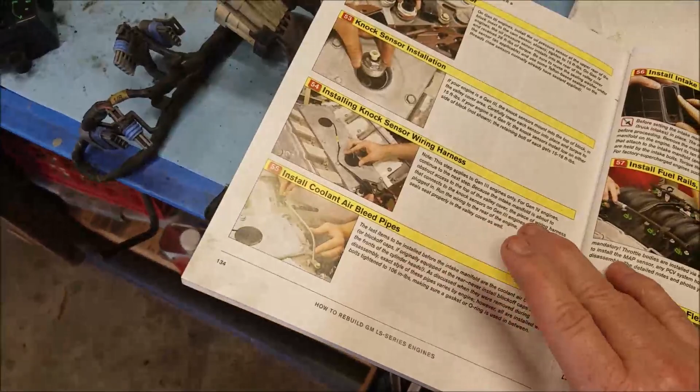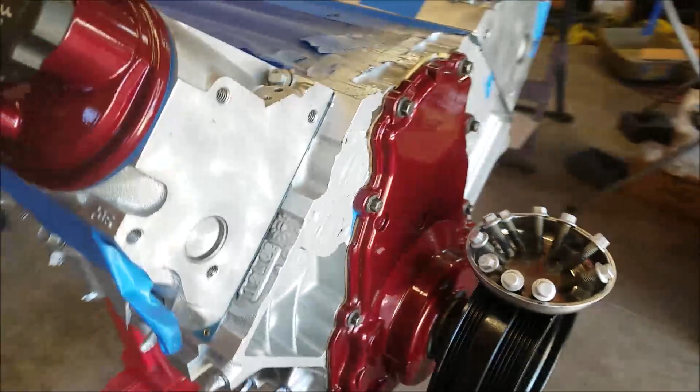All right, we're back at the block, and I did something while you guys weren't looking. If you haven't noticed, I painted the block. Yep, I sure did. I think it looks totally better than the dark color. I think it's just going to look great. Anyhow, it's like 3 coats of paint and a couple coats of clear, and it withstands heat up to 500 degrees. Duplicolor. Yep, that's a plug. Hopefully it stays on and I did it right.

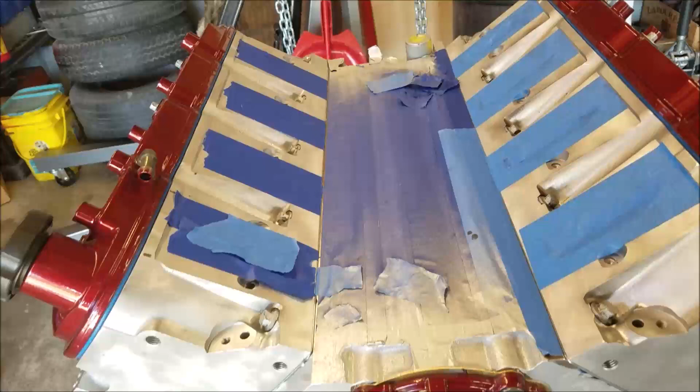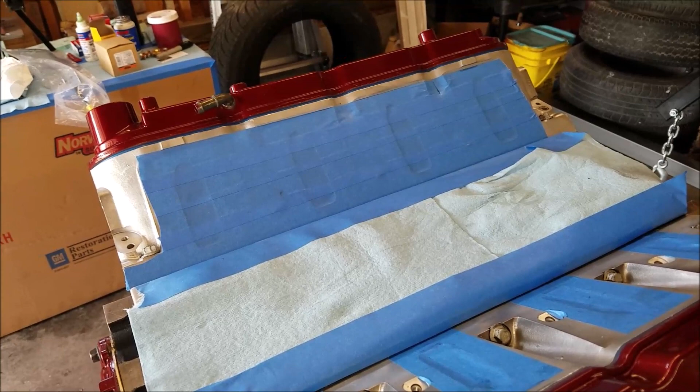But I still have to take the tape off, cathedral ports and everything. But before we do that, let's take a look at the air intake manifold. Before we test fit the LS6 to see where the distance is between the 2 holes, I'm going to draw a little black line around each cathedral port just on the passenger side. And then when we put it on there, the paint will indicate where the other cathedral ports line up, and then we can decide if that's actually the way to go.

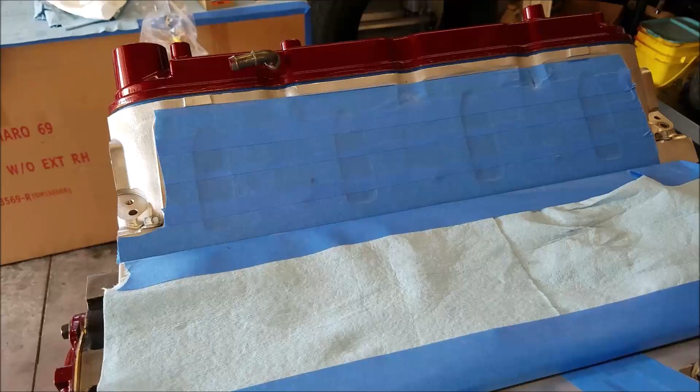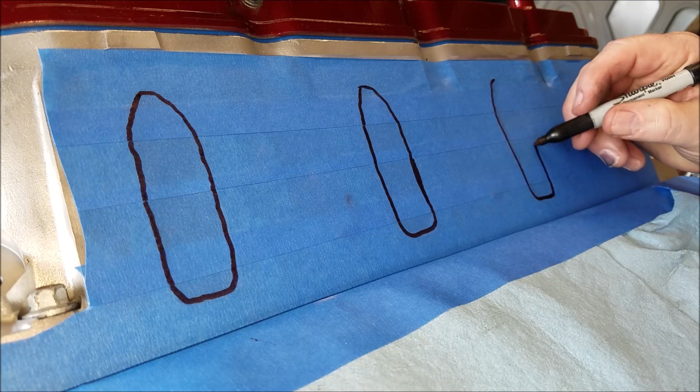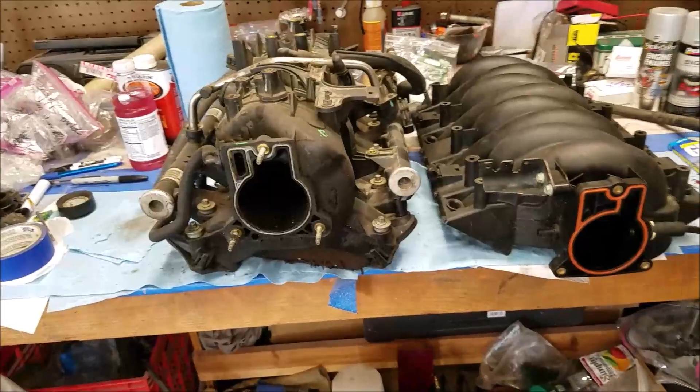All right, let's do a comparison of the 2 air intakes. On the left, you have the original from the 5.3, and on the right, you have the LS6. Starting off, you have an obvious 3.5-inch difference. So one of the reasons I picked what I thought was an LS1, which turns out to be an LS6, is that it's actually better. I'll tell you why. Because of the low profile, of course. When I shut the hood, I think there's going to be a clearance issue. So that's why we're going with the LS6.

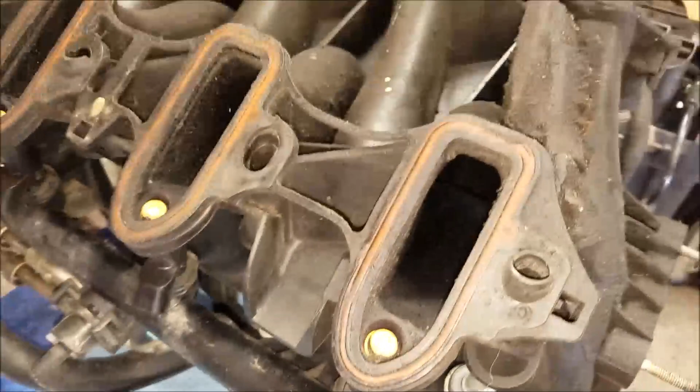Now, will it fit or not? I don't know. I haven't seen anybody do a video on how the ports line up. So we're going to do that. But let me flip it over and show you something. All right, they're upside down, so let's check it out. Let's go over here to the 5.3. You can look at the ports, they're upside down, but they're cathedral ports. So they just look like a bullet.

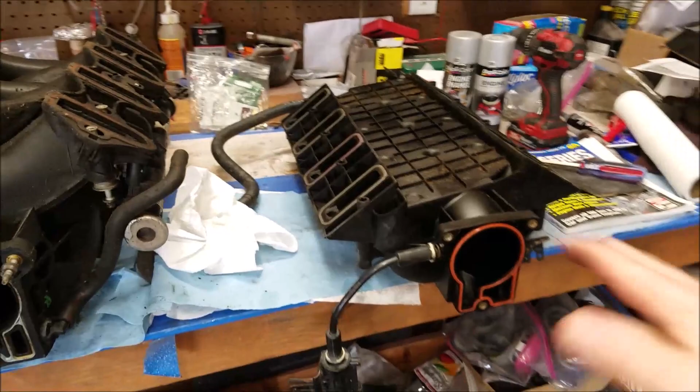And obviously the 5.3 takes in more volume of air. So the reason for using the LS6 is just for clearance, and it looks better. I don't want it to look like a truck engine, you know. I want it to look, I guess, like a 5.7. But it's just for aesthetics. You're losing air volume when you use one of these compared to this. I don't know what the difference is, but it's obvious. You're going to lose the air volume.

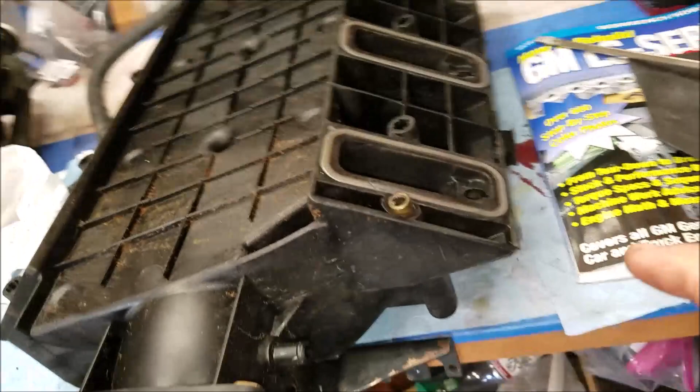So let's look at the ports over here. The ports are rectangular with rounded curves. Also, there's a pad right here, and back over here, it's like a foam pad. It's supposed to stop the water from coming in, but I took them off. On the LS1s, the center here has like a hump, a ridge line that goes down the center. And that's one of the big differences between the LS1 and LS6. I'm almost positive.

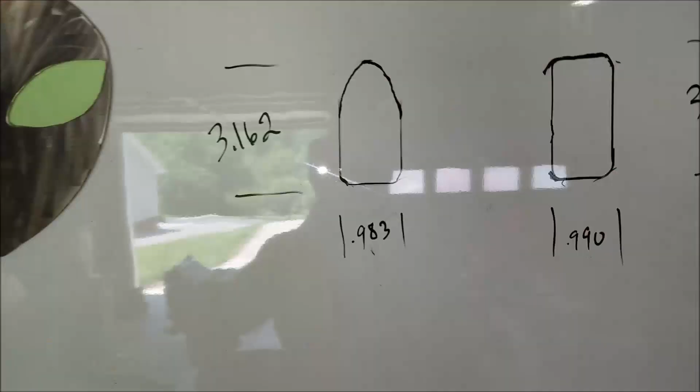So that's what threw me off. I was looking at the bottom, and I was like, wait a minute. This is not an LS1, because an LS1 has that and the LS6 does not. And also I looked at the part number and it came out LS6. Anyways, what we're going to do is compare the size of the intake ports on the LS6 and the 5.3. So I measured the 2, and these are the numbers, and they're not exact. I did use a caliper, but I could be off because I shake.

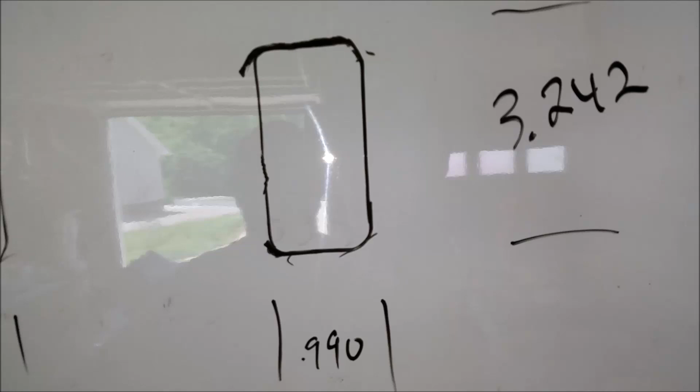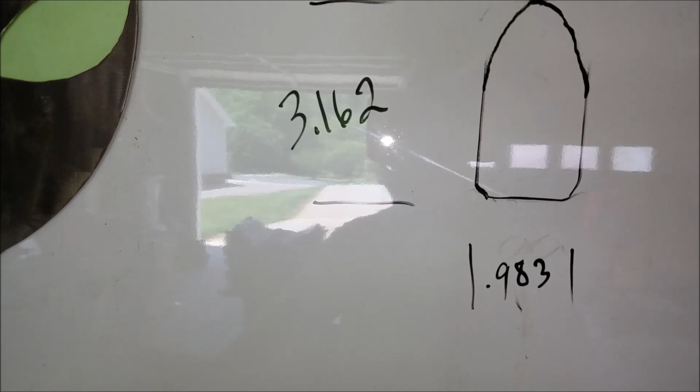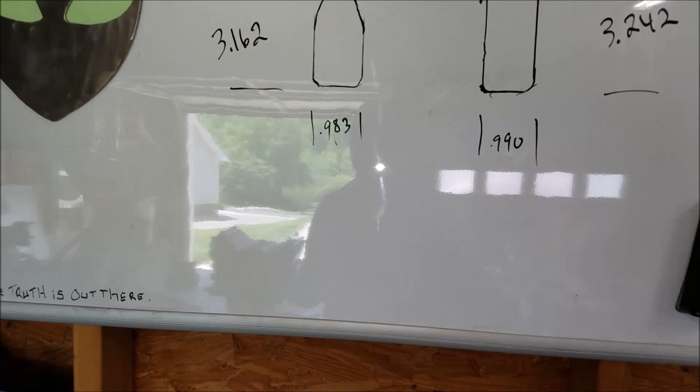Anyways, there's the LS6 on the right, and the overall height is 3.242, and the 5.3, the Vortec manifold, the cathedral, is 3.162. The width, though, is very close. The width on the cathedral is 0.983 and 0.990 on the LS6. As you can see, it's really close, so I don't know. I'm hoping this will totally cover up the cathedral ports when we match it up. So let's take a look at that.

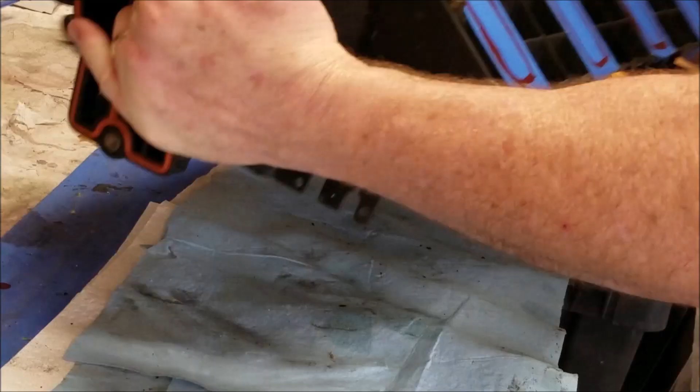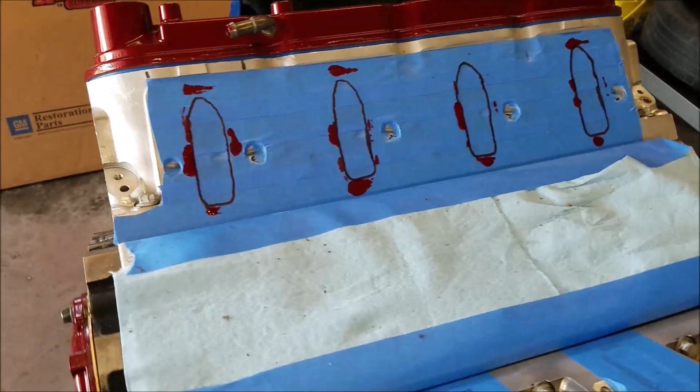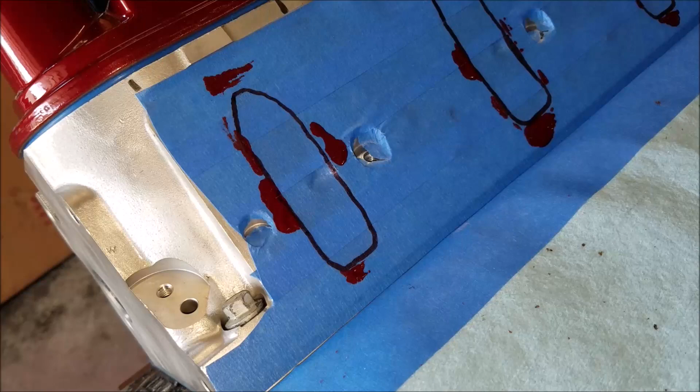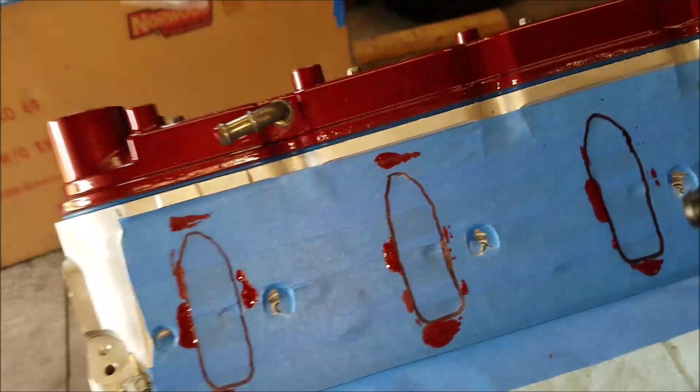All right, let's look at the results. Now, it's not going to be exact because those were the old gaskets, so they weren't sticking up as much. I got new gaskets and everything, so you can get the gist at the bottom of it. The bottom and the top and side to side, it's going to match up. Looks like it pretty much matched up everywhere, and it is covering the Cathedral ports on the heads, so good. I just wanted to check that out, and it does work.

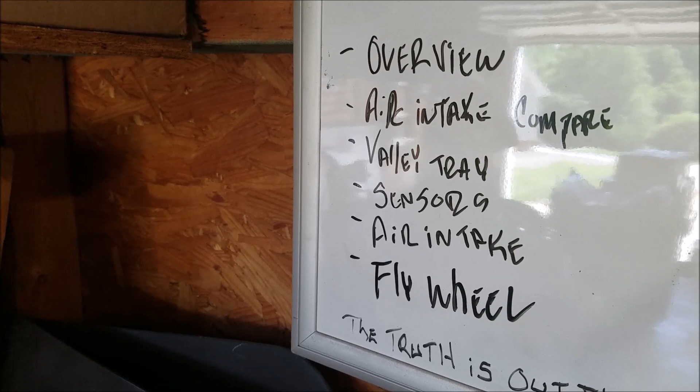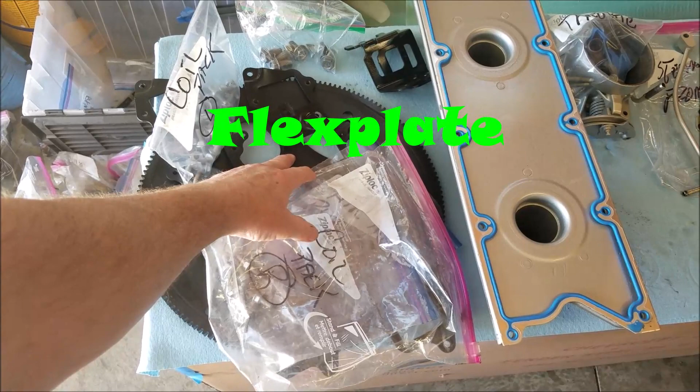All right, now that we've looked at the air intake comparison, we already did the overview of what we're doing. We're going to do the valley tray, the sensors, air intake, and the flywheel. That's all set up right here. We got the flexplate. It's already been painted. We actually had the valve cover brackets for the coils. We're going to actually install those today, hopefully.

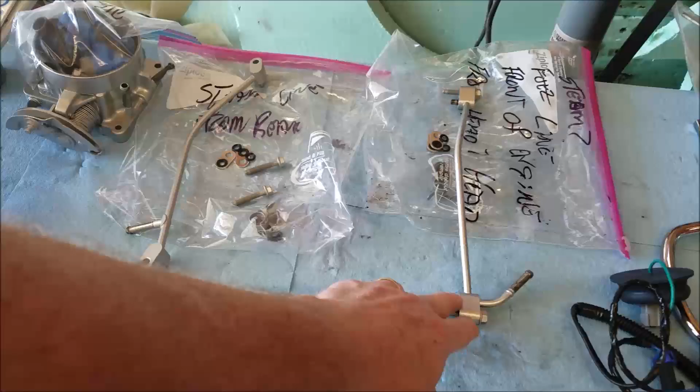And we got the valley tray, which I did paint already. Now the throttle, I went ahead and painted as well. The steam tubes painted, and we got some knock sensor harness and some sensors over here just waiting to be installed. But first thing we're going to do is the valley tray, so let's get started.

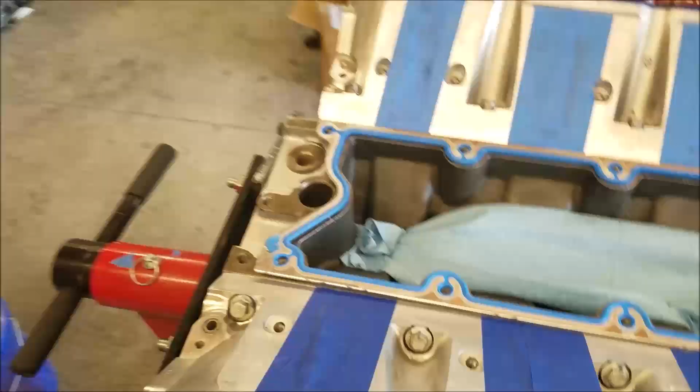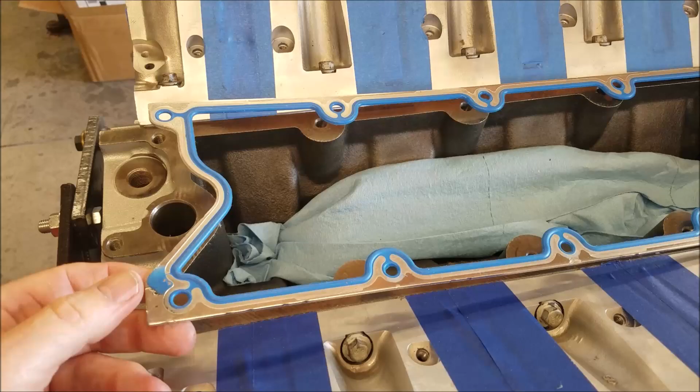All right, just wanted to point something out real quick. I bought the gasket kit for the block, and then I got one for the upper part of the engine. Now this gasket kit came with this type of gasket for the valley tray. Now it fits this way, but you can see this kind of hangs over on this area. It's not going to interfere with anything that I can think of, but

if you flip it over, it still lines up. The holes still line up, but this edge right here is going to interfere with the oil sensor, so you need to make sure that that tab is flipped over. I just realized that. But anyhow.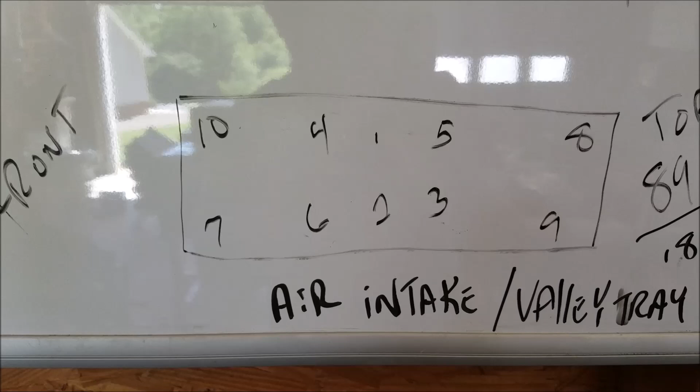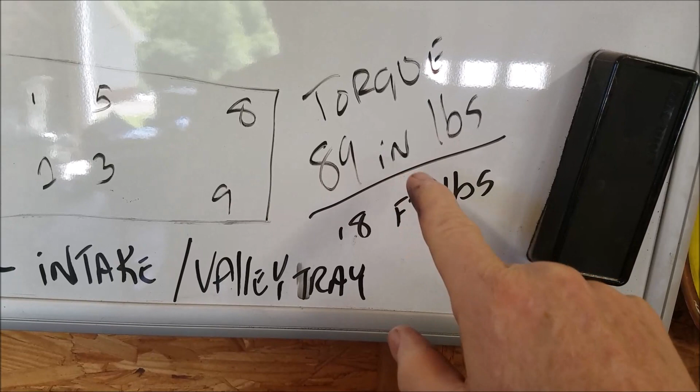All right, the torque sequence is the same for the air intake and the valley tray. It's 1, 2, 3, 4, 5, 6, 7, 8, 9, 10. And the air intake is 89 inch-pounds. The valley tray is 18 foot-pounds. That's the front. You just go back and forth, basically. They're both the same sequence, so easy.

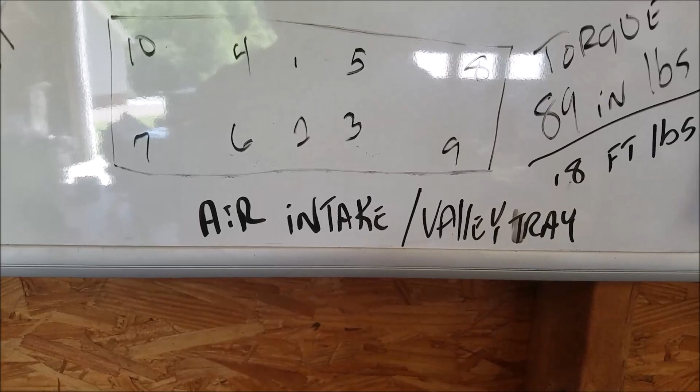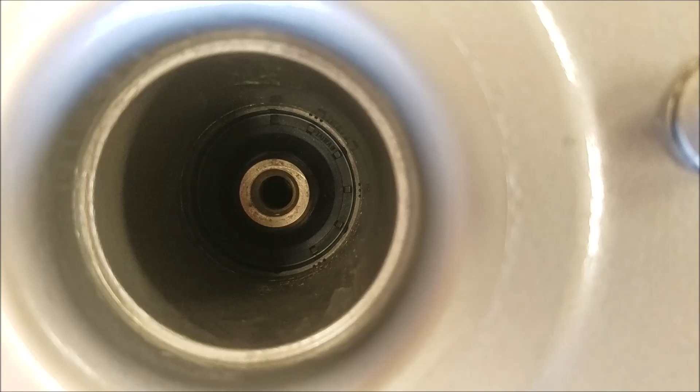All right, next up is the knock sensors. Can you see in there? There you go. You're gonna go ahead and torque these down. The knock sensors I got, the max you can put on it is 20 pounds. According to the manufacturer, 15 to 20 foot-pounds. I'm gonna split the difference.

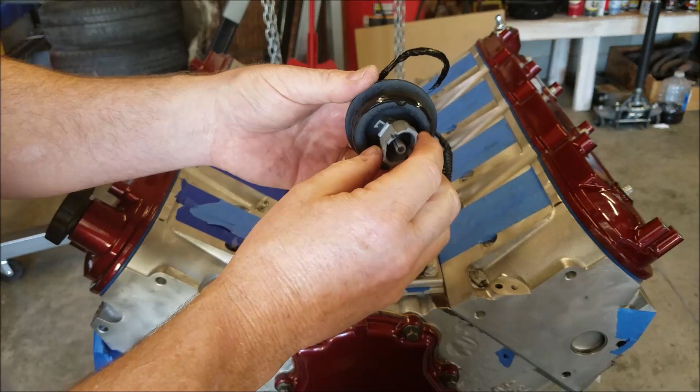Next, we have the knock sensor harness. What this does is you just lower it straight down onto the knock sensor, and these two clips on the sides will clip it in. When you take them out, you squeeze the outside and it'll unlock the clips. Those fit on pretty snug.

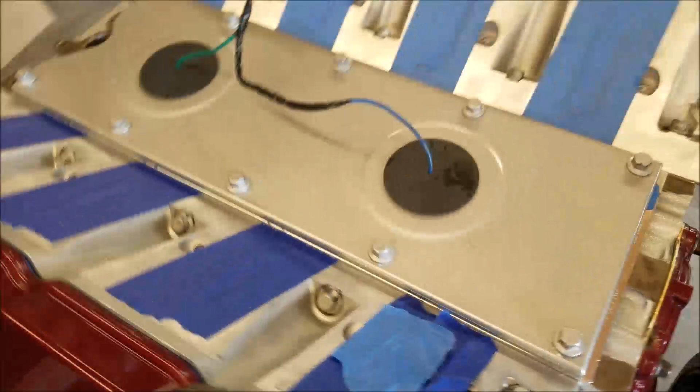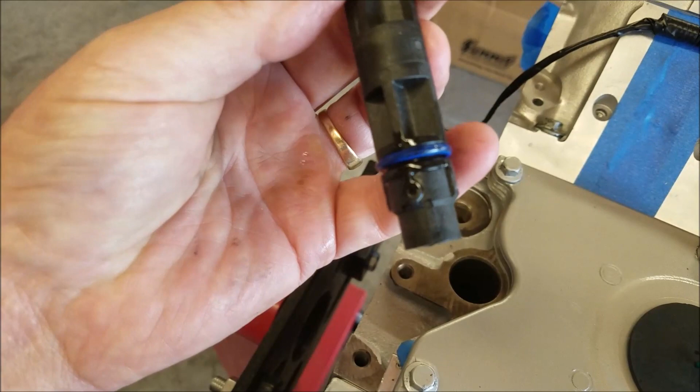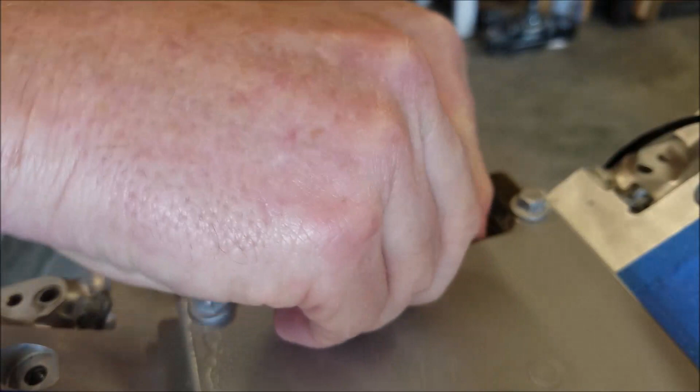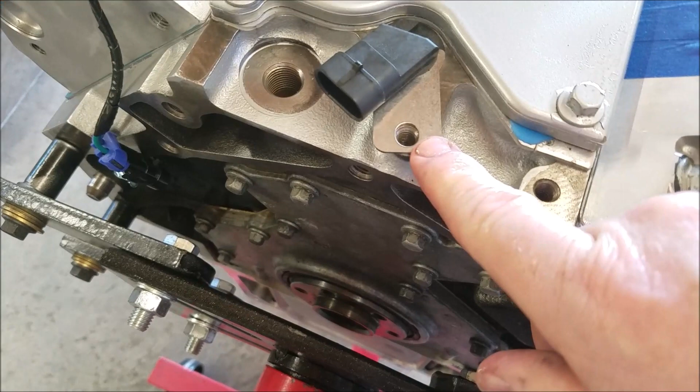Next is the camshaft position sensor. I did put a little oil right there just to make sure it goes into the hole smoothly. All right, there it is. I'm not going to tighten this down just yet because the bolt I'm using, I just put a coat of clear on there and I'm letting it dry. Next, we'll put the oil

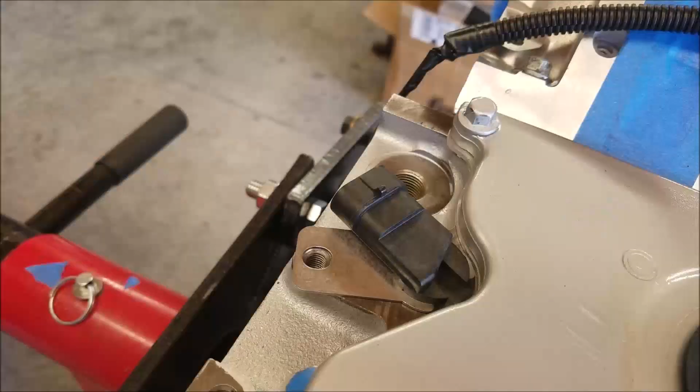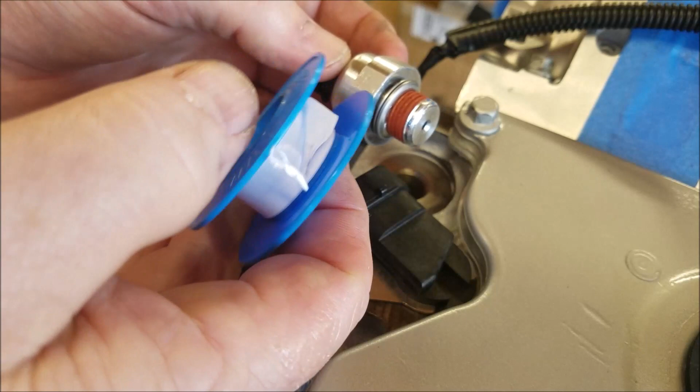It's on as tight as I can get it. I know it's not torqued to specs, but it's as far as I can go. I noticed the difference between the two. You see this one has a longer neck right there. That's one of the reasons I can't get a socket over it.

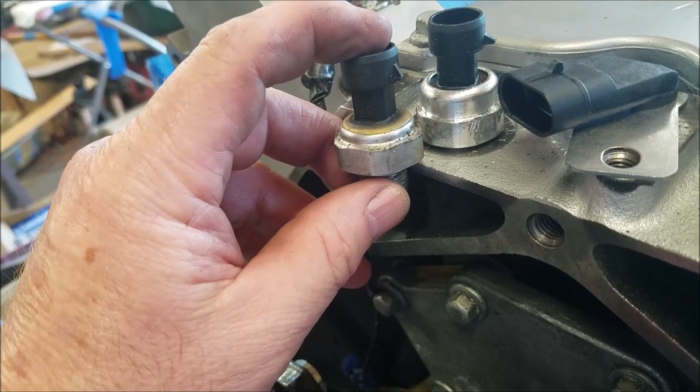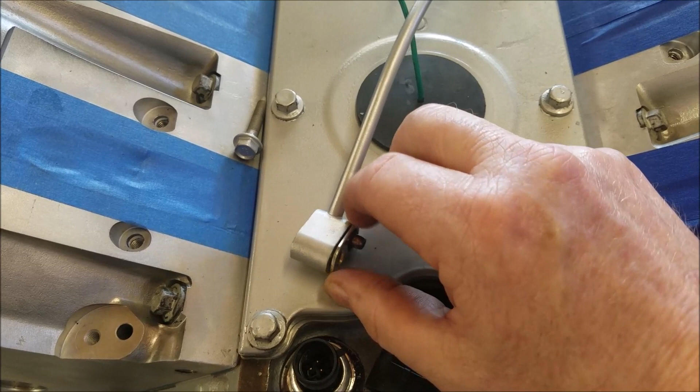All right, next up is the steam line, and as I told you before, I painted it. And the gaskets that came with it are the new gaskets. They look like this. It's just rubberized on one side and plain on the other, so that's where the screw goes. It came with round gaskets, but I'm not able to use those. I don't know why. Anyways, I'm going to put this on. These are 106 inch-pounds.

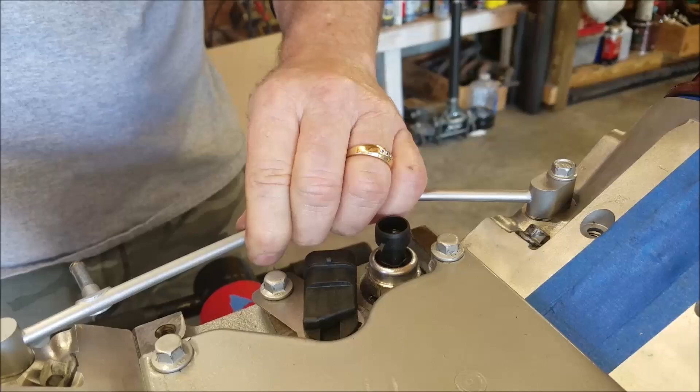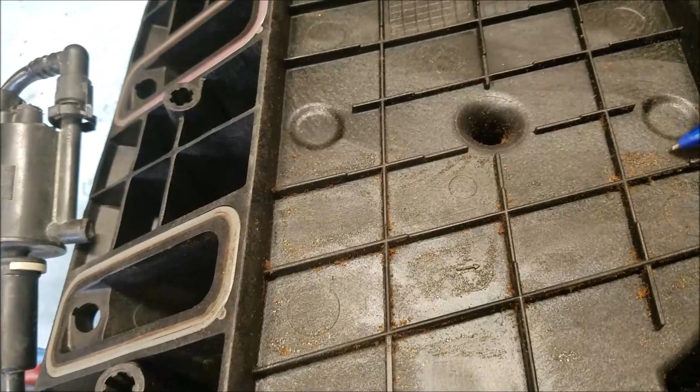All right, next is the air intake and putting on the gaskets and the foam padding. Here's the gasket set. There's the throttle body gasket. You've got to put these foam pads on. As you can see, I already ripped off the foam pads that were here. They were terrible, I'll just say, but you can see the mark. You see the mark where the old one was.

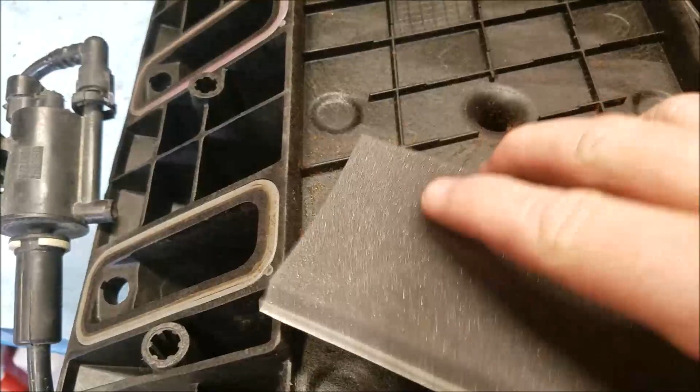So I'm just going to go along that mark. But basically, you just stick it on, trim it if you need to. It just fits in that way, but make sure it's all tight down. And you can use these divots in that hole as a guide as well, front and back.

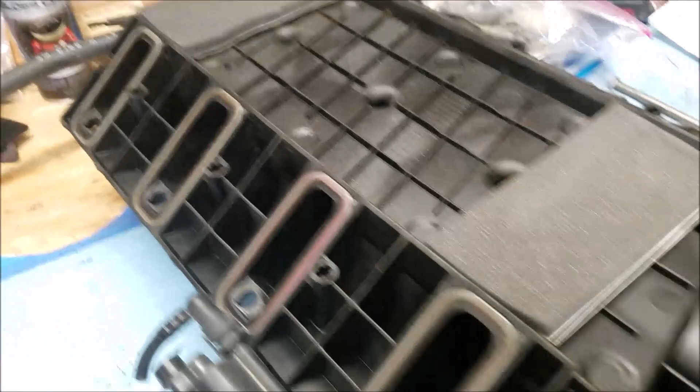Here's the gasket of the throttle body. You're just going to pick it out and maneuver the other one in. There we go. That was it on that.

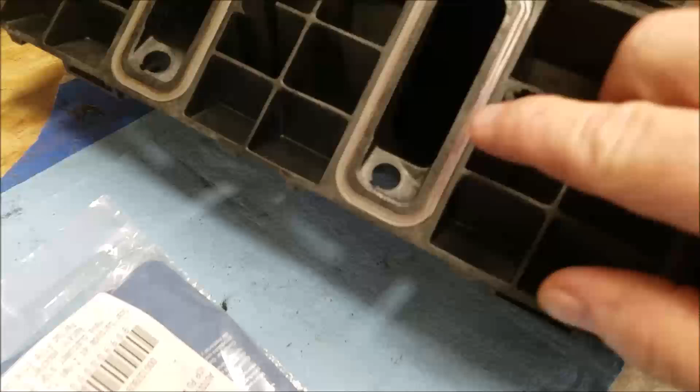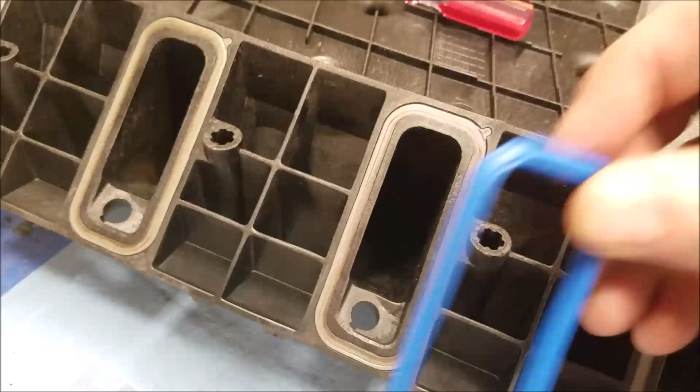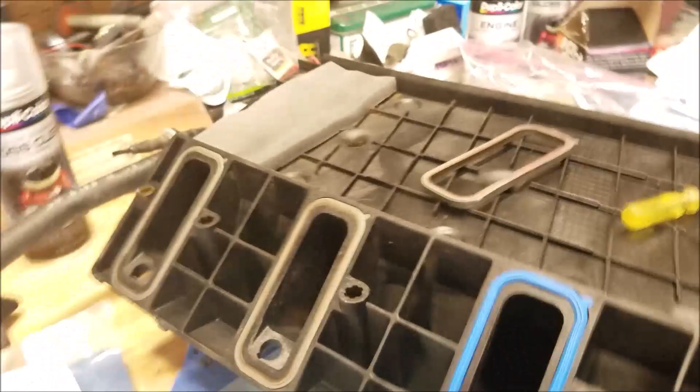Next is the, I guess they're Cathedral Ports, or the ports. You can see it's just flat. It's very smooth, and I don't want that. I want it to stick up a little bit. So hopefully the new one will, and I think it will. It can only go on one way because you have the little tab up in the right-hand corner. It's got a nice ridge line. It should create a nice seal. So let me go ahead and do the rest. Be back in a minute.

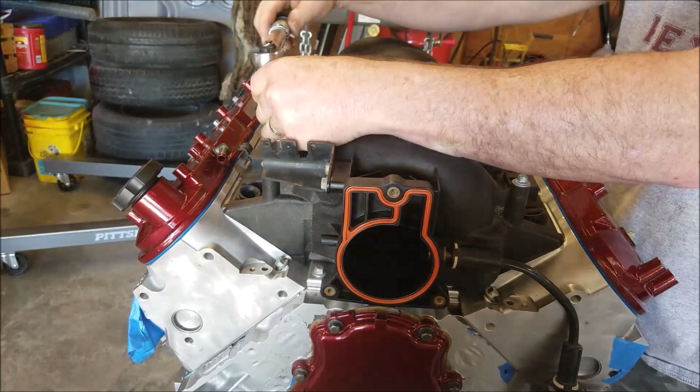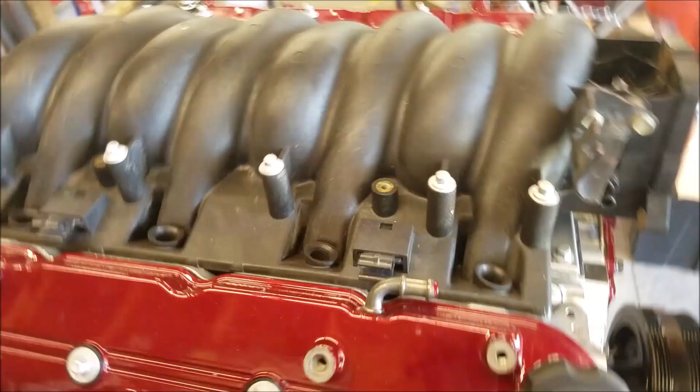There you have it, the air intake is in. It's got a nice seal underneath. That's what I'm looking at, if you're wondering why this is at this angle. It's looking good. And these are 89 inch pounds, 89 inch pounds all the way around. I left the hoses on because I didn't want to take them off, to tell you the truth.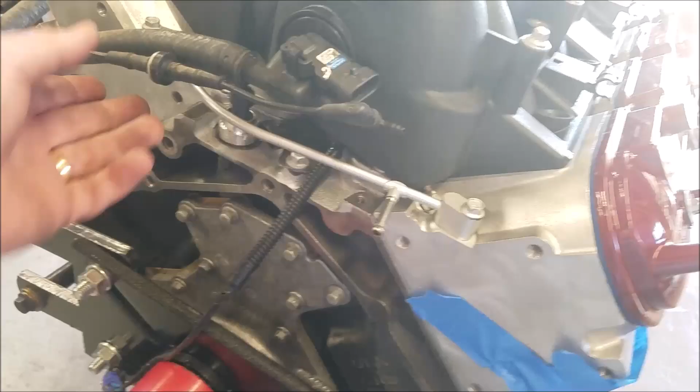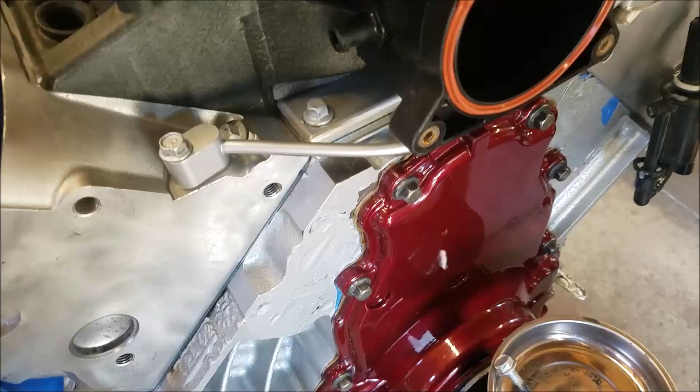Next up is the throttle body, and just to let you know, I already greased them and put them on in that torque sequence, with ultra torque fastener grease from ARP. These bolts get 106 inch pounds, so don't go crazy. Wow, that looks great. With the air intake and the throttle body on there, it kind of gives it a face.

Pretty cool. When you're doing any of these bolts, these are steel, not aluminum bolts, but they're going into aluminum heads. So whenever you're screwing into an aluminum part of the engine, you can strip out these threads pretty easily if you over crank it. So just watch yourself when you're doing that. It'll be all right.

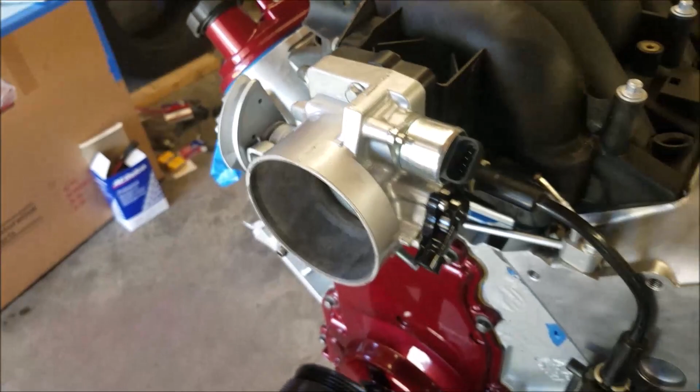I stuck in the steam pipe real quick. This one, of course, was for the truck. So I don't know if that's going to work right there. It's just a tube, probably going to go over, or I'll have it go under. I'll figure out something. Or I'll get another tube that sticks straight out. It'll be easy to change.

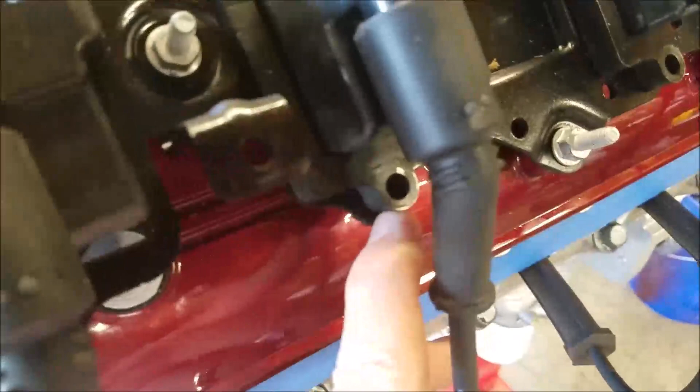All right, throttle body's on, and a few extra things I threw on there in the break I had with the camera of the phone. It looks awesome. I went ahead and put on the sensors right here, I forgot what they are off the top of my head, but also the coil packs, the brackets, spark plugs, spark plug wires, and realized I'm missing some bolts. So I'll have to go to the junkyard and pick some up from another vehicle. I don't think I have any extra down here, but it's looking good.

I still have a flex plate to put on, but I'm going to put that on another day. I'll show you guys in another video. I'm going to end this as a not finished, but almost finished engine. I still need a fuel rail. I don't know if I'm going aftermarket or stock for the LS6, and I need injectors. Those are going to be expensive unless I can get them from the junkyard.